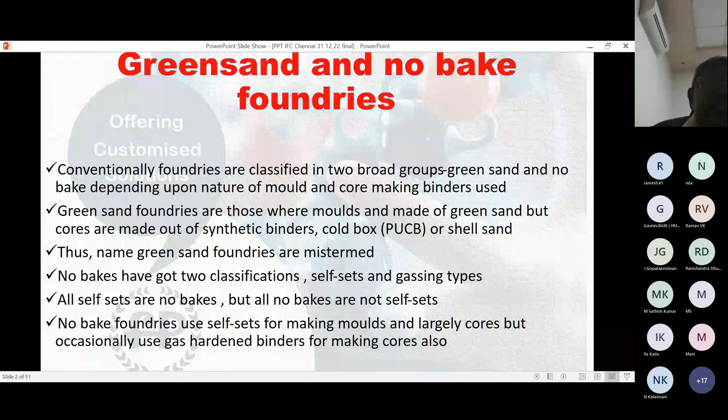So all self-sets are no-bakes, but not all no-bakes are self-sets. Amine cured cold box and carbon dioxide cured phenolic, for example, are no-bakes, but these are subclassified as gassing systems. So this is the total range of self-sets for use in no-bake foundries.

Again, mostly on continuous mixers, these are Furan no-bake, Alphaset, acid cured phenolic, PEP set, alkyd, and silicate self-set. Silicate self-set is in use in very, very few foundries, but it has a future. At present, Furan and Alphaset together enjoy approximately 85% of total market share of binders in use in no-bake foundries.

So this is the present and future of no-bake binders in India. Furan and Alphaset are the most popular, as I have already told you, so our topic of discussion will be on these 2 binder systems.

Phenolic no-bake has been mostly replaced by Furan, but recently many foundries have switched back to 2-part phenolic, replacing Furan again, because of the unusual hike in furfuryl alcohol price and Furan price. These 2 systems are interchangeable, so foundries have the flexibility to switch from one to another depending on prices.

PEP set is in use in a limited number of foundries, to my knowledge, in 2 steel foundries, 2 cast iron foundries for making only cores, and 1 non-ferrous foundry.

Advantages of PEP set over other self-sets: fastest curing. This is the fastest self-set on earth, and curing speed matches almost to gassing systems. The molds made out of the system are extremely rigid with exceptional dimensional accuracy, and castings are also very much free from surface defects and dimensionally very accurate.

The largest weight core mold in India is made with PEP set, with the half mold being 2.5 tons of sand. You cannot expect this type of mold from other binder types. Furan is next, but Alphaset you cannot go for because it does not have enough dry strength to handle some bigger molds.

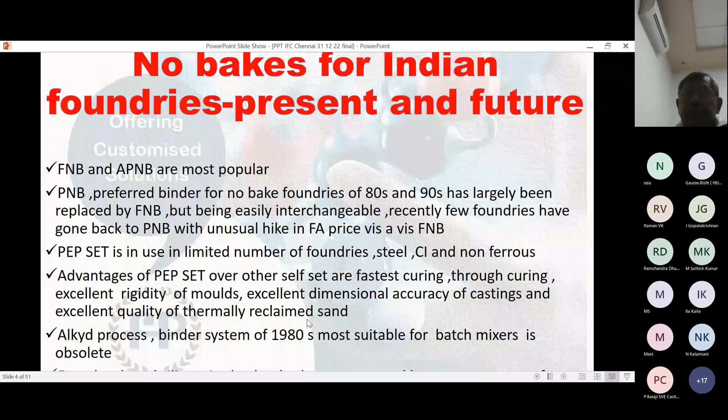So we have talked about the mold making binders for no-bake foundries, particularly in continuous mixers. Cores in these no-bake foundries are preferably made out of gassing systems, and big ones out of self-sets.

Binder systems for mold and cores should be compatible to achieve uniformity in quality of reclaimed sand. For example, Alphaset molds with carbon dioxide cured phenolic cores, and PEP set mold with cold box core - these are compatible and you can reclaim together. So contamination does not matter.

Now the basic requirements for a binder to be competent for use in your no-bake foundry. Strength has been classified into three main sections. Dry strength - this is the strength required by molds at different stages, right from stripping to closing.

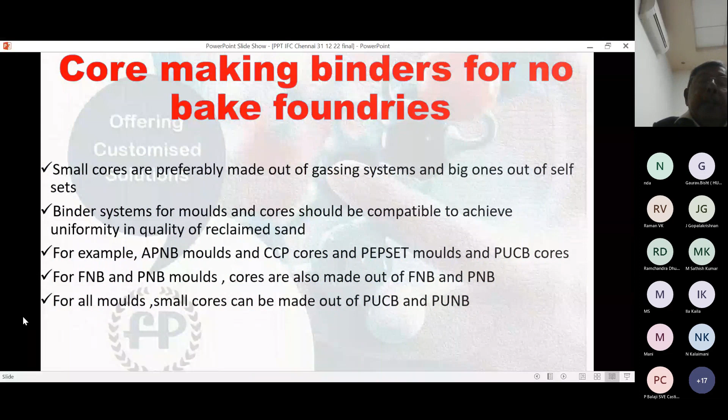Post pouring, the mold should not crack before skin formation is over, in order to resist leakage. The mold should not deform until castings attain rigidity and retain strength. After solidification, the assembly should disintegrate slowly, enabling shifting of the assembly to the knockout zone without much spalling. This disintegration process of molds should be complete after cooling, to enable easy removal of castings, and the system should be cost effective.

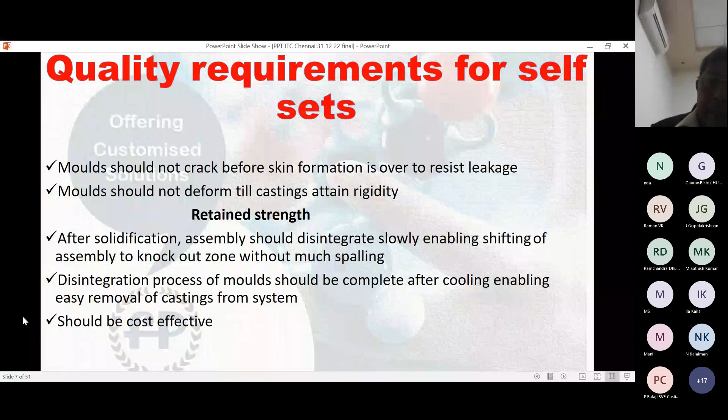So these are the ideal requirements, but no binder is ideal. In practicality, you have to make some compromises — to gain one strength, you may have to lose another. That depends upon the optimization of the use of different binders in particular foundries.

So let us talk about Furan. Furan was introduced in the world market in the 1960s along with acid-cured phenolic. But this system could not find application till the 1980s because these are basically fast systems, and handling them requires continuous mixers. In the 1980s, in the middle of that decade, commissioning of continuous mixers started in India.

Before that, alkyd was the most commonly used self-set binder in batch mixers in Indian foundries. In the mid 1980s, IMF introduced maybe around a dozen continuous mixers through the gentleman Mr. Jack Frost, who is no more. Then Indian foundries started using these two systems, Furan and acid-cured phenolic. But at that time, acid-cured phenolic got preference because Furan formulations were not suitable for Indian conditions.

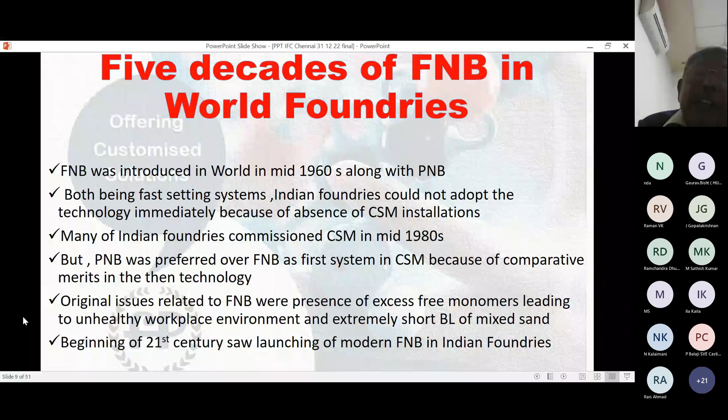The major issues were that these are extremely fast systems, particularly in summer, so the bench life could not be achieved. Also, it had a huge smell of free formaldehyde, a huge irritating smell on the shop floor. So it remained dormant till the end of the 20th century and beginning of the 21st century, with modifications to Indianize the systems. After Indianizing, it became a viable binder suitable for Indian conditions.

So from the beginning of the 21st century, over two decades, it has been modified in many ways. And today it is one of the two most commonly used binder systems in Indian foundries.

Going through the chemistry, it consists of two components: resin and catalyst. Resins are low molecular weight polymers of furfuryl alcohol. Furfuryl alcohol is an agriculture product — it is the only reactant for formaldehyde apart from phenol. This is an agriculture-based product.

So furfuryl alcohol and formaldehyde are reacted in the presence of either urea or phenol or both. For formaldehyde, there are three reactants. The catalyst is a single or blend of aryl sulfonic acids like paratoluene sulfonic acid, xylene sulfonic acid, etc., with occasional blending with sulfuric acid, which acts as a kicker particularly at low temperature. Apart from the polymerized form, furfuryl alcohol also remains in free form in binders, which contributes to the strength of composites.

Furfuryl alcohol, when added with acid, reacts violently to polymerize and the mass becomes very rigid. That means free furfuryl alcohol also acts as a binder for sand particles. It is beyond the scope of this presentation to explain why all acids cannot be used, such as nitric acid, sulfuric acid, or hydrochloric acid, because these don't give the required bench life with the mixed sand — they give uncontrolled reactions. The curing mechanism is that Furan resins are not stable below a particular pH, so by lowering the pH of the resin, its curing takes place.

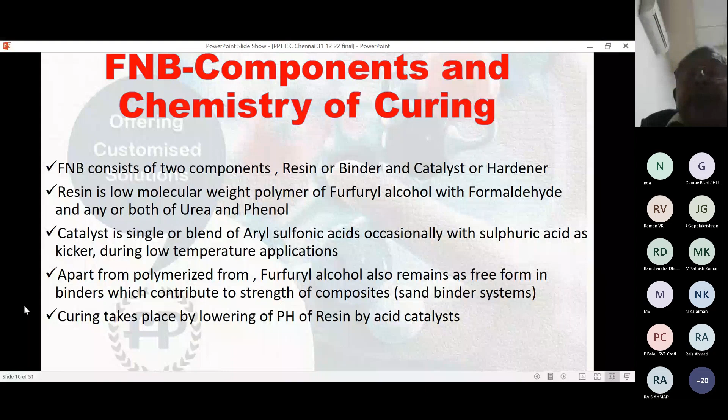So what is modern FNB, and what are the deficiencies? Formulations of Furan have been modified in many ways after understanding the chemistry of polymerization. Original Furan formulations were based on low molecular weight polymers of furfuryl alcohol and urea with formaldehyde — that is, urea, formaldehyde, and furfuryl alcohol — with free furfuryl alcohol as reactive diluent used to be part of the formulations.

So this is the polymer of furfuryl alcohol, urea, and formaldehyde, with free furfuryl alcohol as reactive diluent. Most present formulations contain phenol as a third reactant, along with furfuryl alcohol and urea, formaldehyde being the common reactant. So there are 3 reactants at your disposal for reaction with formaldehyde, giving huge flexibility in formulating the resin from the standpoint of a manufacturing chemist.

Furfuryl alcohol alone with formaldehyde does not produce workable polymers, at least for use as no-bake binders in foundries. That means, although it's possible to react furfuryl alcohol with formaldehyde in different pH conditions, it does not form a workable polymer as a no-bake binder. You need to add either urea or phenol or both.

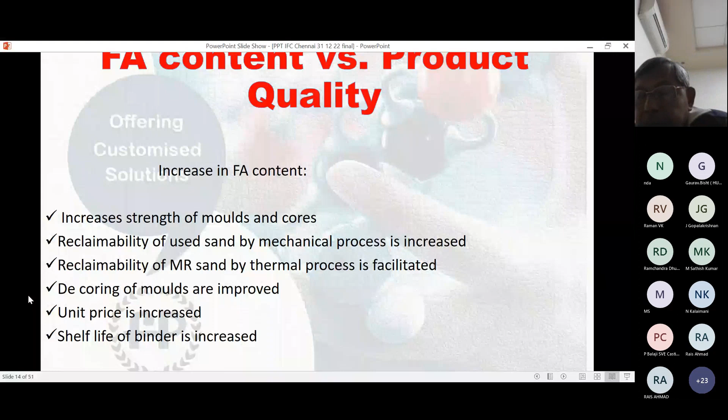Then comes the moisture content. Increase in moisture content increases bench life of mixed sand, but decreases storage life of binder, because the phenolic component of the resin slowly advances, and when it advances to a particular stage, viscosity increases. So it decreases storage life of the binder, and reduces through-curing of molds because water remains and does not evaporate from the system, nor is it consumed in the system.

In case of flaskless molds, it causes occasional puncture of molds because of formation of extra steam at the pouring temperature of metal, and it induces hydrogen porosity in steel and aluminum castings.

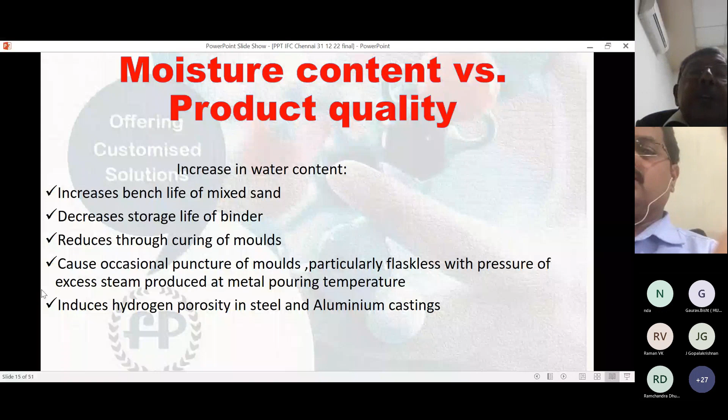Nitrogen content versus resin quality. Nitrogen content in binder is the most important criterion related to binder quality - the more nitrogen, the lower the quality rating. Nitrogen comes into the resin from urea, one of the reactants already discussed. Urea in polymer chains dissociates into elemental nitrogen at the pouring temperature of iron, which has solubility in liquid iron. Entrapped nitrogen causes pinhole defects in castings.

Solubility is directly proportional to liquid metal temperature. Pouring temperature being higher, logically, steel is more prone to nitrogen pinhole defects than cast iron. In contrast to the popular belief that furan cannot be used in steel foundries because of the presence of nitrogen in the system, modern furan has proven to be suitable for all types, sizes, and thicknesses of steel castings without nitrogen-related defects.

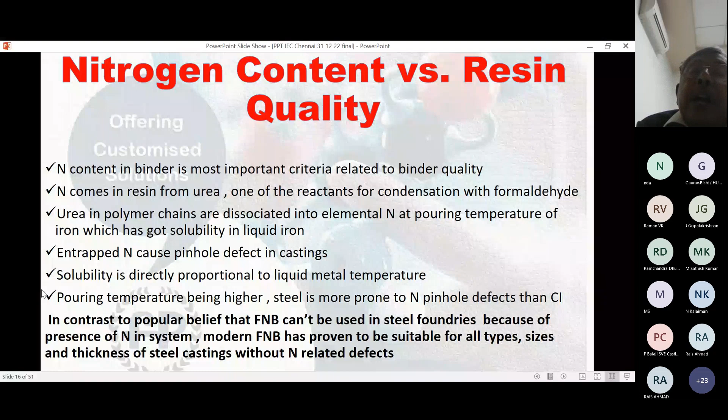Source of nitrogen is more important than total nitrogen. We have already discussed that nitrogen in elemental form is soluble to the metal, not in molecular form. So all nitrogen bearing components are not equally prone to dissociation to eliminate nitrogen. Nitrogen from urea gets easily dissociated to eliminate nitrogen.

As for example, hardeners for cold box and PEP set contain MDI, where nitrogen content varies from 7.84%, and it is added 0.8 to 1% by weight of sand. But castings produced in molds and cores made using these systems are not as prone to nitrogen pinhole defects, as here nitrogen is bound in complex form, resisting dissociation to elemental nitrogen.

So this is the limit of nitrogen - it is a thumb rule and book value. Furan as binder for cast iron casting should have nitrogen less than 3%. Furan as binder for steel casting should have nitrogen less than 1%.

It is more appropriate to talk about percentage of nitrogen in molding sand than in binder. Nitrogen in molding sand for cast iron should be less than or equal to 0.15%. That is the value I have copied from BCIRA, and many foundries using cold box test nitrogen to see that this limit is not exceeded. For lightweight steel castings, nitrogen should be less than 0.10%, and for heavy steel castings it should be less than 0.05%.

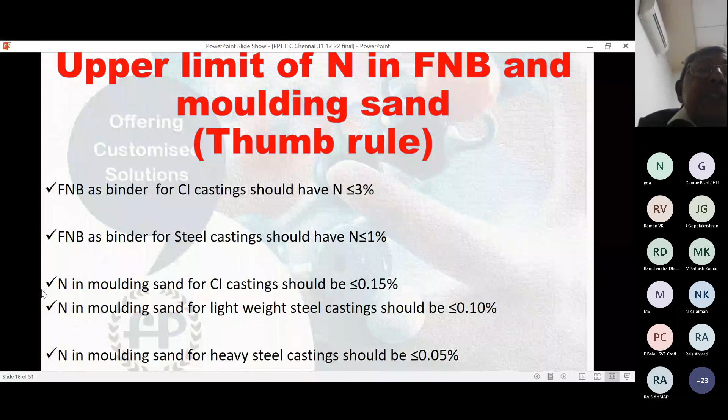Now comes sulfur in molding sand. Sulfur comes in molding sand from sulfur-bearing acids used as curatives. The most common acids are paratoluene sulfonic acid and xylene sulfonic acid, both aromatic sulfonic acids. In India, xylene sulfonic acid is rarely used because it is required only at temperatures below 10 degrees centigrade, a very low temperature application, and it is always costlier than PTSA. As I have already told, sulfuric acid is also sometimes added at low temperature to increase the rate of setting.

Mathematically, sulfur content in PTSA monohydrate is 16.85% and in sulfuric acid is 32.69%. Why am I talking about PTSA monohydrate? Because solid PTSA crystallizes out of water as monohydrate, just as copper sulfate comes with 5 molecules of water. This is the topic foundrymen know better than me, but as customary, I have taken this out of literature or some published papers.

SG iron demands less than 0.03% sulfur in molding sand to avoid denodularization of the surface of castings. In some publications, the value given is less than or equal to 0.7%. Apart from that, precipitation of magnesium sulfide takes place when molding sand contains excess sulfur, which counts as inclusion in castings. Special thinner-based coatings containing graphite and magnesium oxide are used in many cases to compensate for loss of magnesium used for nodulization. In steel casting, sulfur is generally regarded as an impurity and needs to be reduced to practicality, except in some special cases, one being ease of machinability.

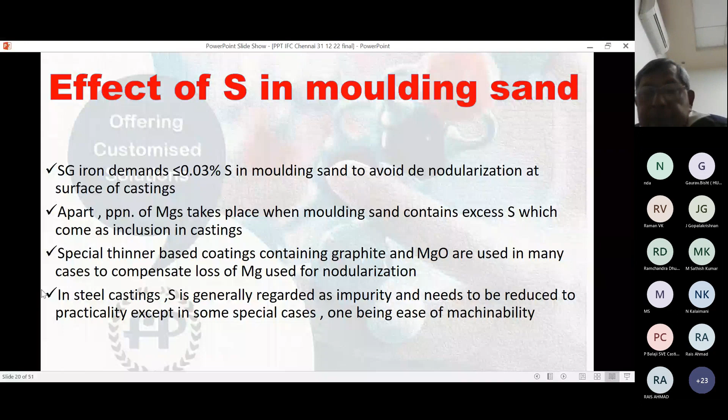So other acids are catalysts. Phosphoric acid is the only non-sulfur-bearing acid used as curative for furan. It is mostly used in combination with sulfur-bearing acids as it does not perform well alone. Carriers or diluents for all catalysts are water or methanol.

Potency of catalyst varies depending upon dilution ratio. For example, if you take paratoluene sulfonic acid, you can dilute it up to 70%, 60%, 50% - the more it is diluted, the less reactive it is, which increases bench life. But there is an upper limit of dilution. You cannot make it 90% because at that point it reaches the saturation temperature of the acid and precipitates. So in most cases, the upper limit is not more than 75%.

Apart from dilution, you can also control by percentage addition from 30 to 60%. So there are two variables for you: one is the dilution ratio of active component and carrier, classified as strong, medium or slow acid, and the other is percentage addition, which is 30 to 60%.

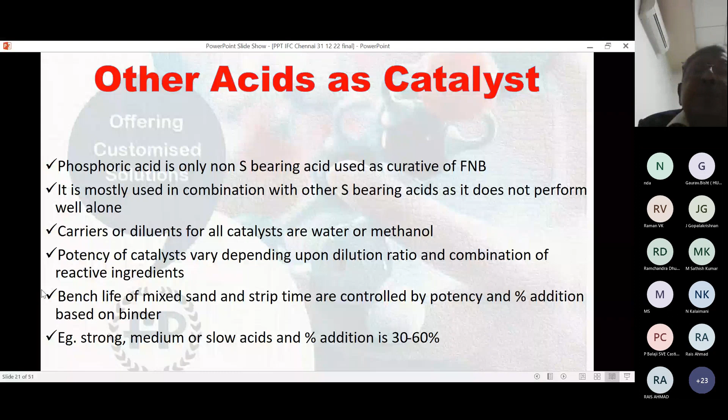So this is the latest development in Furan technology: extremely low binder demand, 0.75% in case of mechanical sand; improvement in dry as well as hot strength; improvement in tensile strength as never before; binders with extremely low nitrogen as low as 0.4% and even nil; variants with high collapsibility for use in non-ferrous castings; customized formulations with better understanding of chemistry; and modern formulations containing extremely low free formaldehyde, offering an extremely congenial workplace environment.

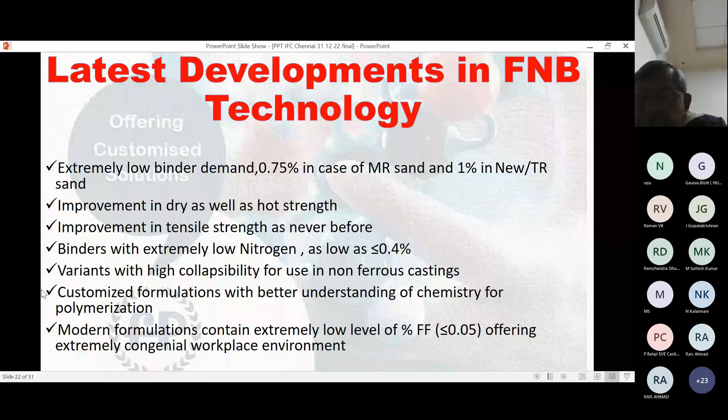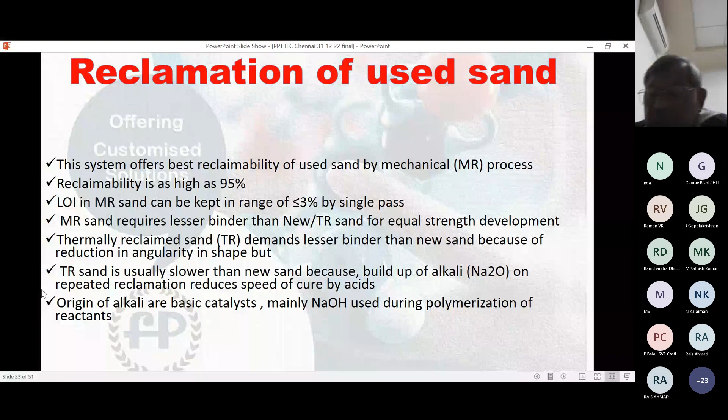Reclamation: this system offers the best reclaimability of used sand by mechanical process, as high as 95%. Low LOI in mechanical sand can be kept well below 3% by single attrition. Mechanical sand requires lesser binder than new sand for equal strength development. Thermal or TR sand demands lower binder demand than new sand, but thermal sand is usually slower than new sand due to build-up of alkali on repeated reclamation. The origin of alkali in the reclaimed sand is sodium hydroxide, used in the manufacturing of phenol formaldehyde resin.

So now I have given most of the foundrymen the sand controls. Then carry out this test as a routine test. LOI is a very simple test; I'm not going to elaborate much.

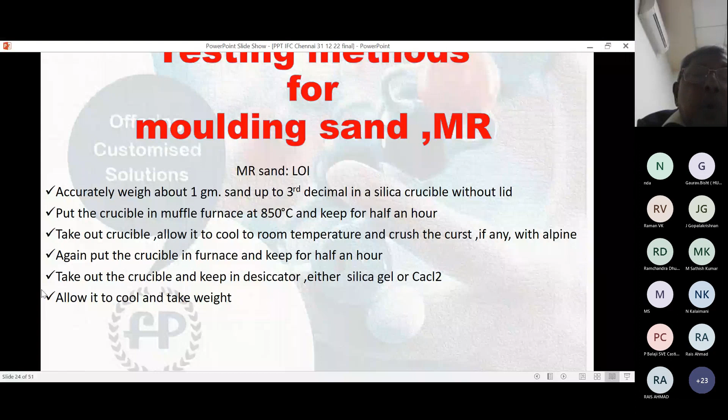The theory is that you take a small quantity, around 1 gram of mechanically reclaimed sand, in a silica crucible, and allow the volatiles to go at 850 degrees centigrade to remove all the volatiles. Organic matter will burn away and inorganic or sand will remain along with a small amount of sodium oxide. So LOI is expressed as the percentage of mass lost during the experiment, based on charge weight.

This alkali demand value is just the opposite of acid demand value for virgin or raw sand. Around 5 grams of sand is taken into a 250 milliliter flask, thoroughly boiled, filtered, and the filtrate is completely transferred to another flask. It is titrated against standard sodium hydroxide caustic solution using phenolphthalein as indicator, and the figure is expressed as milliliter 0.1 normal NaOH per 100 gram sand.

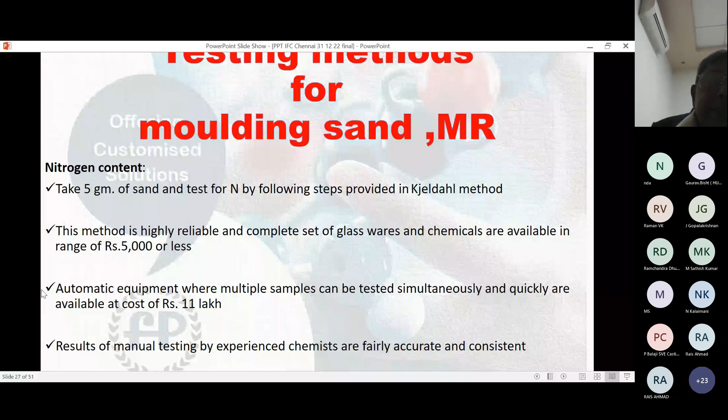Now comes nitrogen content. This is the most important test, and it is a little difficult unless the chemist has practiced it, but in routine testing it can be done easily. The theory involves a special apparatus called the Kjeldahl apparatus, named after a Danish scientist who invented the process. The glassware costs not more than 5,000 rupees including chemicals. An automatic instrument is available, but the semi-automatic instrument itself costs around 11 lakhs, and manual testing by an experienced chemist is good enough. So this is the theory.

First, on the left-hand side, there is a Kjeldahl flask. Here the small sample to be tested is taken into the flask and different reagents are added along with sulfuric acid. It is digested where the nitrogen-containing compounds are converted to ammonium sulfate with sulfuric acid. This is the first stage of the reaction.

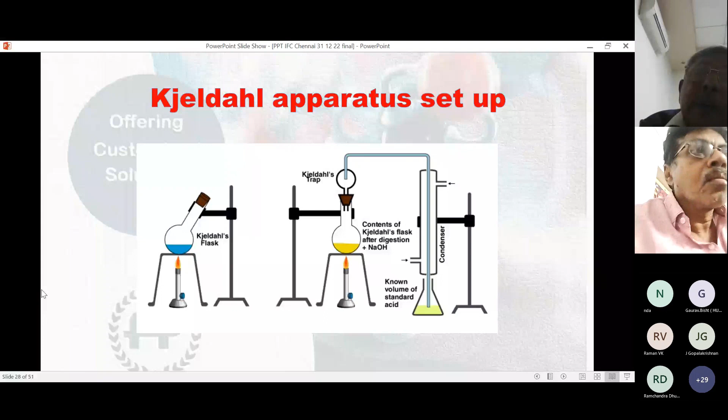The second stage of reaction is on the right-hand side. This is the Kjeldahl attachment, the round bottom flask you are watching. It is transferred from the left mass to the round bottom flask mass on the right-hand side, and the following attachment is the Kjeldahl attachment. In this flask, strong sodium hydroxide is used to convert all the ammonium sulfate to ammonia, and that ammonia is absorbed in either dilute acid or water in the conical flask at the bottom.

When all the ammonia is dissolved, if you are using a small quantity of standard acid, the ammonia liberated will consume the acid to some extent, and the excess acid is titrated with standard alkali using methyl orange as indicator. So 17 grams of ammonia will form 14 grams of nitrogen. Based on the input weight, you can calculate it as a percentage.

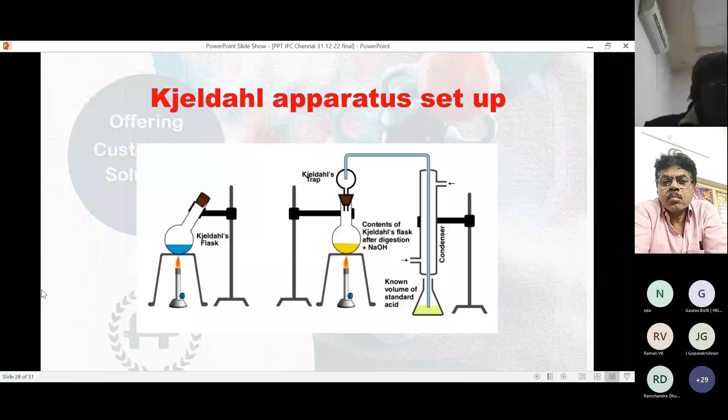Then sulfur content. Sulfur content is also a very intricate test, and many research laboratories have an analyzer called CHNS. These elemental analyzers are available at different IITs, but my experience of getting samples analyzed at this low value of sulfur is not very good. I had given samples to 2 laboratories, and results were far from reality even in my standard sample. So in our laboratory we have tried to develop a test, and we have seen that results are fairly accurate. I will tell you the theory, and we have the calculations which you can go through afterwards leisurely.

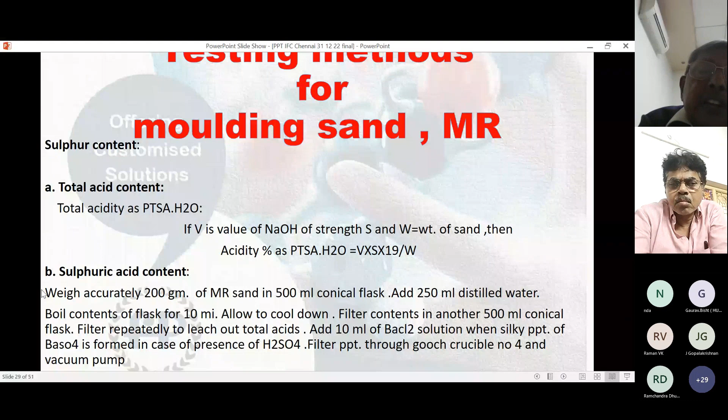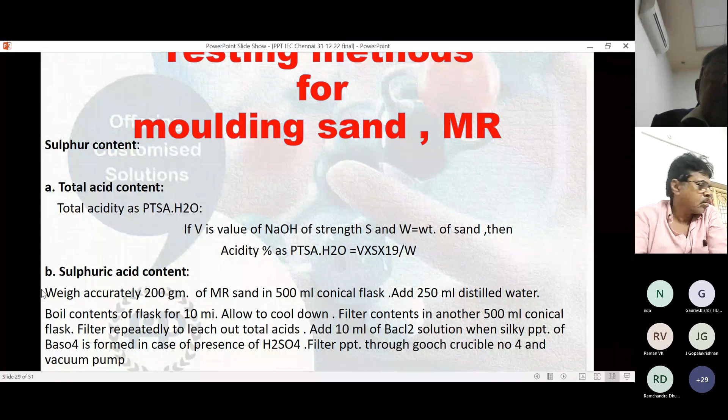First, for sulfur, the sample, like the testing of alkali demand value, is boiled in water and transferred to a conical flask by filtration, where all the acids, including sulfuric acid and PTSA, being water soluble, come into the flask. Then you titrate with standard alkali, 0.1 normal caustic soda, to get the total acidity, and you calculate the total acidity assuming it is paratoluene sulfonic acid. So from the titer of the sodium hydroxide you can find how much paratoluene sulfonic acid is there. Now you have assumed it is only PTSA, but it may or may not contain sulfuric acid also.

So the next step is that to the same filtrate, you add barium chloride solution. Barium chloride forms a sulfate precipitate with sulfuric acid only, not with paratoluene sulfonic acid. The barium sulfate formed is a very silky precipitate. You filter it with a Gooch crucible number 4 with the help of a vacuum pump. The Gooch crucible retains all the sulfate as barium sulfate, and by weighing it gravimetrically, you know how much barium sulfate has formed, which is equivalent to how much sulfuric acid, and that sulfuric acid is equivalent to how much paratoluene sulfonic acid. So deduct the total sulfuric acid from the paratoluene sulfonic acid figure, and now you get 2 components.

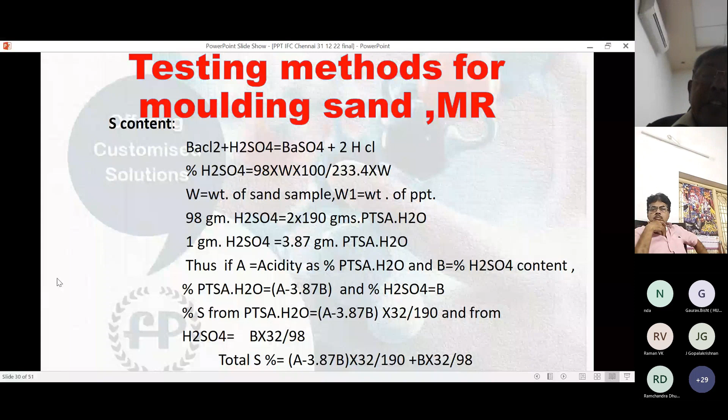With sulfur bearing components: one is PTSA, another is sulfuric acid. With the figures I have already given you, you can calculate how much percentage sulfur comes from sulfuric acid as well as from PTSA. These calculations, if you want, I'll forward to you. These are very accurate tests.

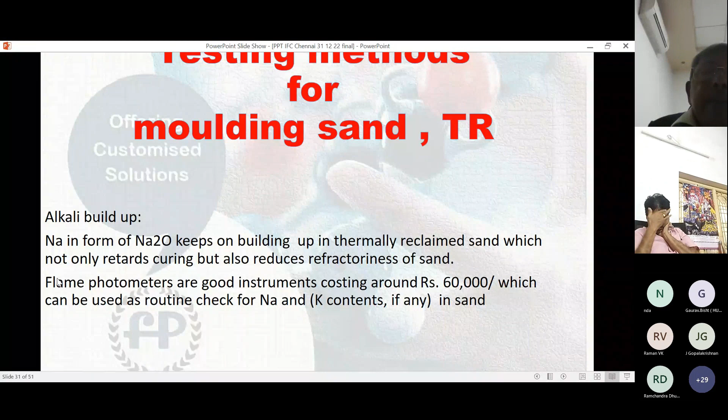So this is for your Furan.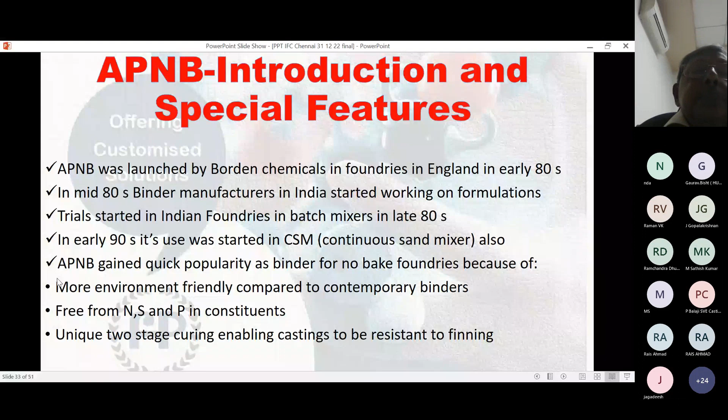In brief, this is the details of Alphaset. There are two component systems. The resin is phenol formaldehyde resin, and small chains are restricted, surrounded by potassium and sodium ions. These small chains are separated by this, meaning the media is strongly alkaline, and this phenol formaldehyde resole type resin is one-stage resin. That's why it advances in storage, so stability is lesser than Furan. Hardeners are esters of polyhydric alcohols or polybasic acids. The total organic composition of the binder here is only 40%, the rest being water and alkali.

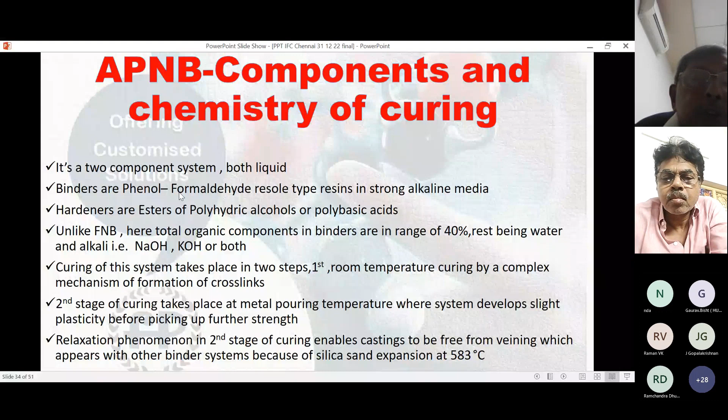Curing of this system takes place in two steps. First, room temperature curing by a complex mechanism of formation of crosslinks - this is precisely the hot stage, your dry stage. The second stage of curing takes place at metal pouring temperature, where the system develops slight plasticity before picking up further strength. Relaxation phenomena in this second stage of curing enable castings to be free from veining, which appears with other binder systems because of silica sand expansion at 583 degrees centigrade.

This is a mechanism I have tried to establish for the first stage of curing. See, curing is always meant by formation of lateral primary bonds and conversion of thermosetting material. So the first line you can see is a linear chain, and second, some lateral chains have formed.

So this gives the molds and cores made out of your Alphaset bonded sand, for which it is sufficient right from stripping to closing. So basically it is a dry stage.

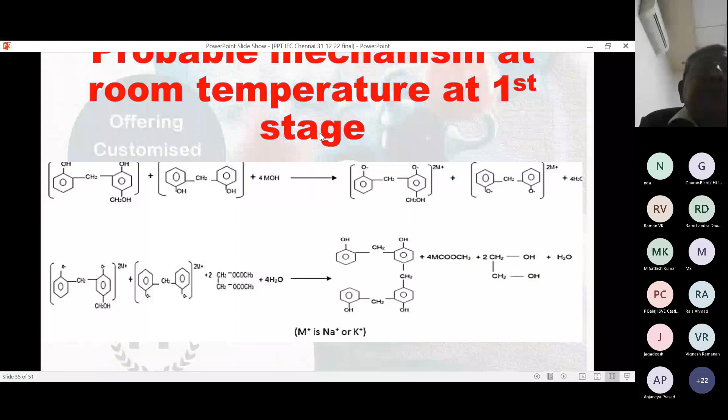So what is the development in recent time? With better understanding of the chemistry of polymerization and curing in the last 3.5 decades, it has been possible to modify resin formulations in many ways. This led to the launching of a series of hardeners in the beginning of the 21st century to achieve diversified bench life and strip time. That was one addition in the beginning of the 21st century. Then it has been worked on to give longer storage life. Then optimization of variables like total alkali, ratio of total alkali of sodium and potassium, and moisture content - all to give customized formulation required for individual foundries.

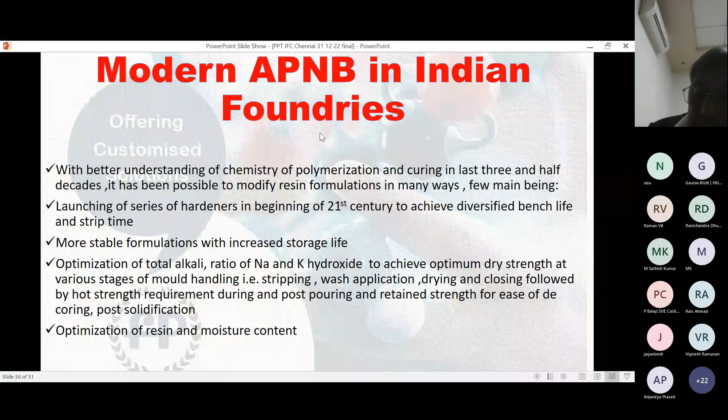Unlike Furan, where the percentage of furfuryl alcohol in the finished product has a direct relationship with quality, in Alphaset there is no such constituent with similar importance. So the usual composition of the binder is resin 35 to 45%, water 45 to 50%, and alkali 10 to 15%.

So this is the most widely discussed topic - it is the sodium-potassium controversy. I have written controversy because many foundrymen believe that potassium... of course, these ideas are spread by suppliers only to undermine other chemicals, because it is believed that as potassium hydroxide is costly, people compromise with quality by adding more sodium hydroxide. But we have already experienced that that is not the case.

However, I have given you two references, both from European journals. In both publications, they have not told anything regarding the quality of castings and relations with the type of alkali used. These publications only talk about the reclaimability of used sand while using the two types of alkali. Sodium hydroxide gives better reclaimability in mechanical process, and potassium in thermal process. They have not written anything regarding the quality.

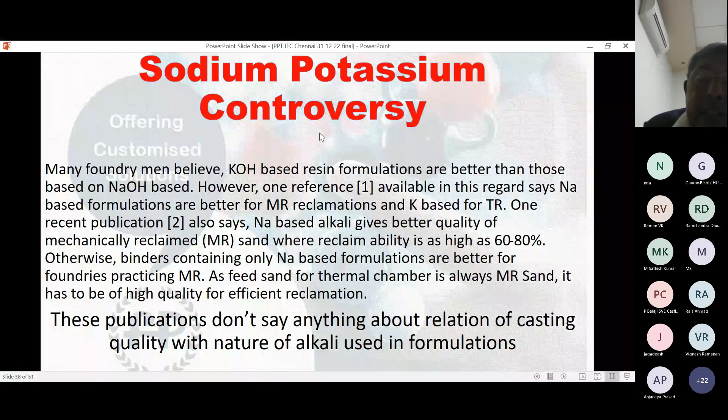But this is one more paper where a group of researchers, while converting a steel foundry from sodium silicate to conventional means, first used an Alphaset potassium based system. With the conventional potassium based system, when they converted, they found improvement in surface finish and hot tear of the castings. While converting from sodium silicate to potassium based system, surface finish and hot tear of castings improved, but shrinkage of large castings was experienced - that is, using potassium based Alphaset.

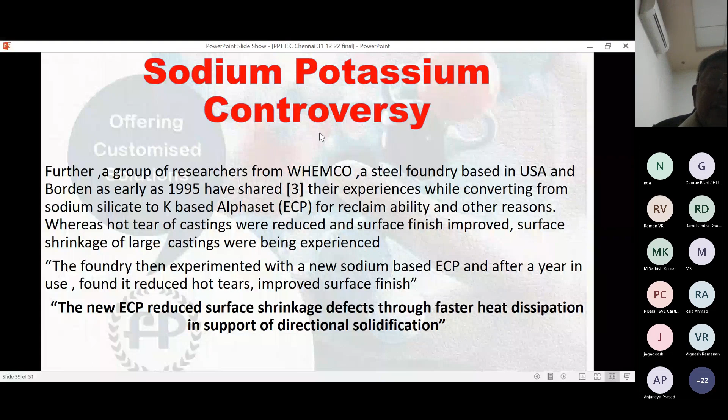The foundry then experimented with a new sodium based ester cured phenolic, and after a year in use, found it reduced hot tears and improved surface finish. The new ester cured phenolic reduced surface shrinkage defects through faster heat dissipation in support of directional solidification. This is not my word - this is recorded, and this is the reference I have given. You can cross-check from the literature.

So now for the final phase, your comparison.

APNB works with binder level of 1.2 to 1.6%, which is much more demanded than your Furan. Furan works at as low as 0.8% in reclaimed sand. Quality of reclaimed sand is also far better in case of Furan compared to Alphaset. With all this, even a new sand at 2% addition, rarely does Alphaset sand exceed dry strength of 25 kg per centimeter square, whereas mechanical reclaimed sand using 0.8% goes more than 45 per centimeter square dry strength.

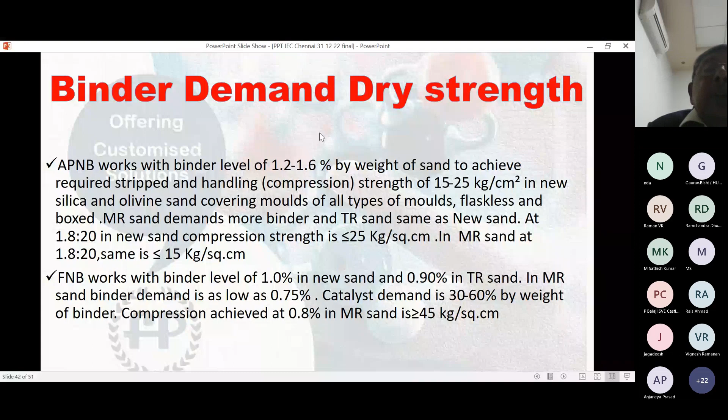So this is already discussed, and mechanical reclaimed sand for Alphaset is very weak in bond formation. Even while using in backing sand, you need to increase the binder content so that it does not spoil.

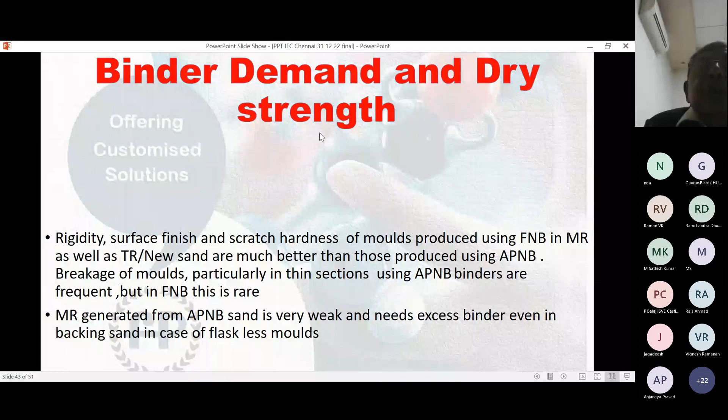This mechanical attrition offers reclaimability of as high as 95% in Furan, and maximum 70% in case of Alphaset. Mechanical reclamation followed by thermal reclamation brings reclaimability of Furan sand to practically 100%. It is not required in case of Furan sand. Still, many foundries reclaim a small portion of their mechanical sand by thermal method so that their input of new sand is reduced.

Thermal reclamation for Alphaset sand requires a special chemical in form of aqueous slurry for pumping in thermal chamber along with mechanical sand for removal of inorganic salts along with fines. This involves capital investment and recurring cost also.

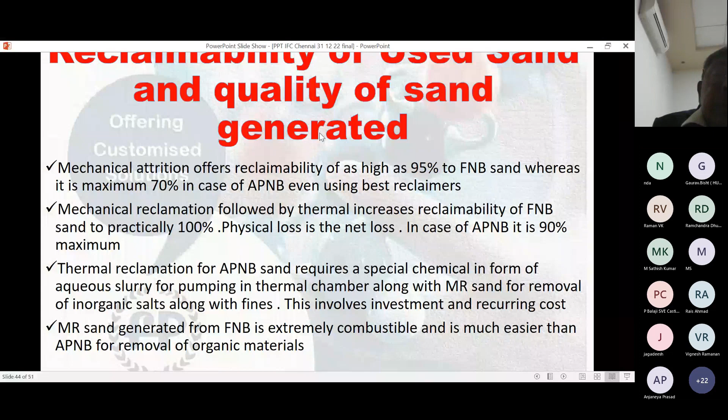Mechanical sand generated from Furan is extremely combustible and much easier than Alphaset sand for removal of organic materials. In this direction, Furan users must work hard, and there is some reference work going on at AGH University, Krakow, Poland, where they have a prototype reclaimer. I have seen publications and visited that institute personally. I know the professors; they are working on the disposal of fines generated from mechanically reclaimed Furan sand.

Stability of thermal reclaimed sand - this is an observation. Thermally regenerated APNB sand or Alphaset sand has been found to lose reactivity and drop in strength with binder on storage, reaching a stage of no reactivity. Of course, I should add that I have not studied all sand from all foundries, but a couple of foundries have been studied and we found that reactivity decreases to a point of no reactivity along with the binder. In case of Furan, buildup of sodium leads to slowdown in reactivity, demanding more catalyst, but no drop in strength is experienced unlike Alphaset.

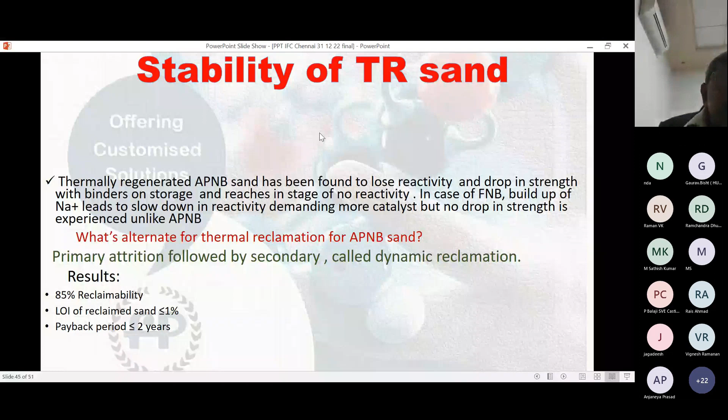What's the alternate for thermal reclamation of APNB sand? Because 65% is no good, maximum 75%. So I've got a couple of examples: primary attrition followed by secondary, called dynamic reclamation. Here, reclaimability of 85% is assured, LOI of reclaimed sand less than 1%, and payback period reported in a particular foundry is less than 2 years.

Environment: binder components of Alphaset contain phenol formaldehyde resins. Although not a must for Furan, most formulations have it. It is well documented that phenol formaldehyde resins are safe for internal and external use in ambient conditions. You must know the Scotch-Brite used for cleaning utensils contains phenolic resin. So as a resin, phenol is not harmful.

However, many of the organic compounds released on pyrolysis of phenolic resins at metal pouring temperature are toxic to different extents. Content of free phenol, a potential toxic chemical, is less than 0.5% in Alphaset and less than 5% in Furan. Both are lower than the upper limit of the most widely used core making binder, phenolic urethane cold box. But I won't say this is not harmful - it has to be reduced further.

Then formaldehyde is toxic and an eye irritant in free form. In APNB or Alphaset, it is too low to be traced by analytical instruments. In modern Furan, its value is reduced to as low as 0.05%.

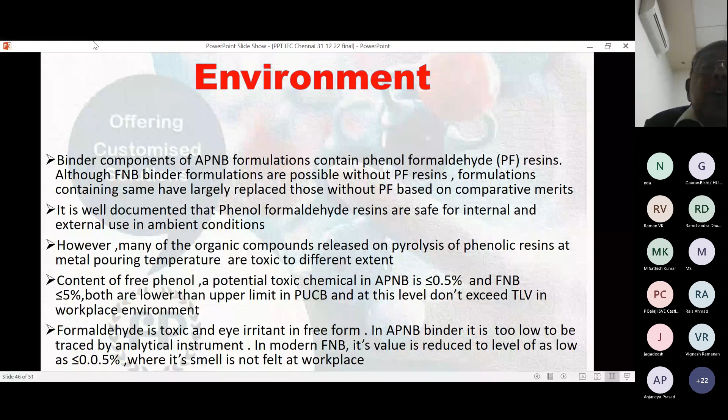So this is a relatively unknown phenomenon. One of the main reasons for quick acceptance of Alphaset was its least adverse impact on environment compared to contemporary systems. However, it was later realized that this system releases formaldehyde, a potential eye irritant, during curing with the hardeners. This is felt in the shop floor during mold movement and also during baking after wash application. In Furan, this phenomenon is not evident.

So this is the mechanism. I don't think whether you can see it.

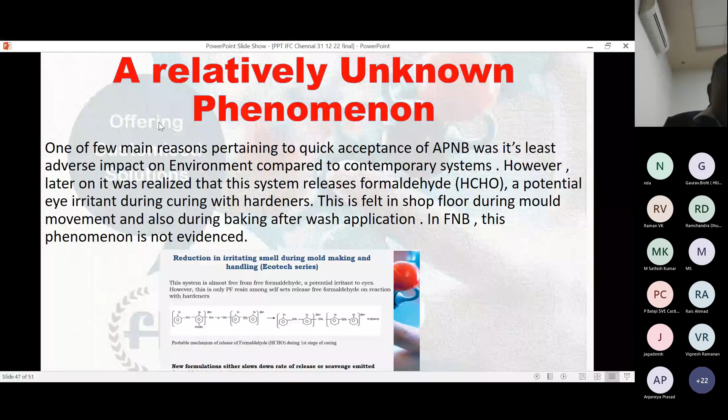This is the mechanism by which formalin evolution during curing is possible with Alphaset. I have a couple of slides more.

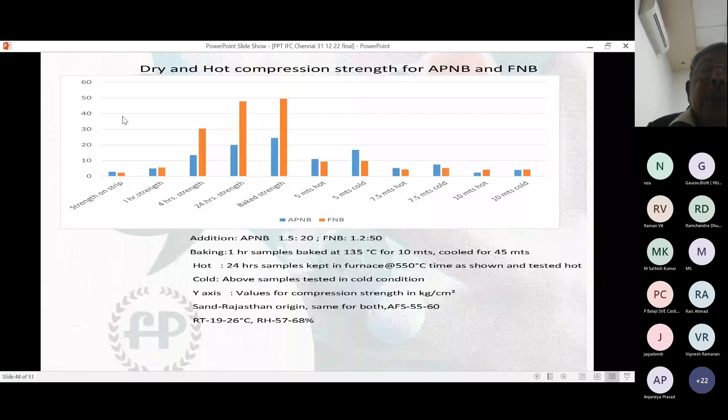As I told you, strength requirements of binder systems can be categorized into 3 sections: dry, hot, and retained strength. On the left, you see the dry strength of Alphaset and Furan at practical addition levels, where Furan has enormous strength. But after metal pouring, the strength of Furan mold drops drastically, even below the level of Alphaset. Usually, inorganic binders, mainly sodium silicate, have very good hot strength, but dry strength is lower, so binder addition has to be increased to raise dry strength, which eventually increases hot strength too. That is the disadvantage. Alphaset, being a combination of inorganic and organic, gives a compromised formula for dry and hot strength. This is its strength and weakness.

I think this is the last slide. You have to have patience for another 2 minutes.

Silica sand choice for Alphaset is wide; in Furan it is limited. Flexibility of formulation in Alphaset is limited with a lot of variables; in Furan it is wide. Storage life for Alphaset is 2 months in summer, whereas in Furan it is more than 6 months. Performance during storage life in Alphaset deteriorates, particularly in summer. If you use it after 7 days versus after 17 days of manufacture, you will find a difference in formula reactivity. The range of bench life of mixed sand in Alphaset is wide; in Furan it is narrower than Alphaset.

Dry strength is good for Alphaset but excellent for Furan. Hot strength is excellent for Alphaset and good for Furan. Decoring is difficult for Alphaset, good for Furan. Reclaimability by mechanical means is 70 to 85% in Alphaset, 85% in Furan. Reclaimability is 90% for Alphaset and 98% for Furan. Quality of mechanically cleaned sand is poor in case of Alphaset, excellent in case of Furan.

Recipe or use level is 1.2 to 1.6 is to 20 in case of Alphaset; it is 0.8 to 1.1% is to 40 to 50 in Furan. Casting finish is excellent for Alphaset, fairly good for Furan. In recent Furans we have seen—I cannot quote the foundry names—people have made Furan castings up to 15 tons of steel casting, and another foundry regularly makes 2 to 5 tons of steel casting using the latest version of Furan. I have seen the casting; these have excellent gloss. If you compare cost at a practical addition level, they are more or less the same. So overall economy is good in case of Alphaset, better for Furan.

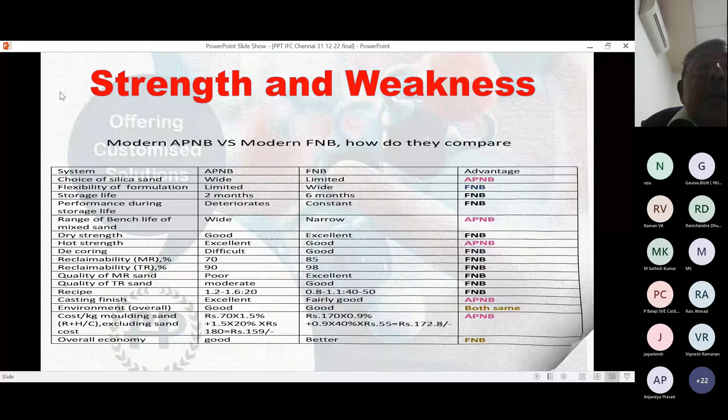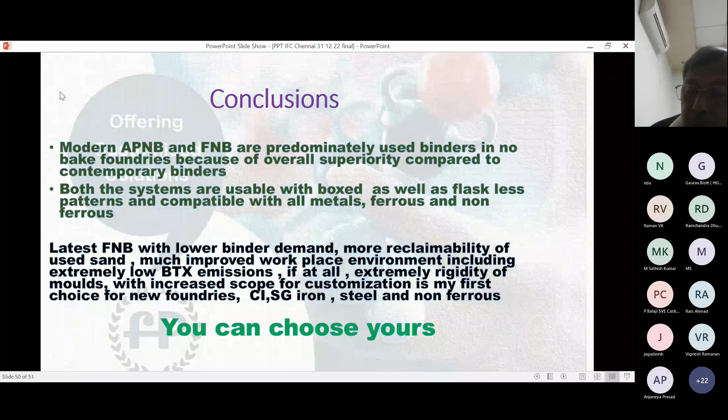So these are my conclusions. Modern Alphaset and Furan are predominantly used binders in no-bake foundries because of overall superiority compared to contemporary binders. Both systems are usable with boxed as well as flaskless molds and patterns, and compatible with all metals, ferrous and non-ferrous. Latest Furan, with lower binder demand, more reclaimability of used sand, much improved workplace environment including extremely low BTX emissions if at all, and extreme rigidity of molds with increased scope of customization, is my first choice for new foundries—cast iron, SG, steel, and non-ferrous. You can choose yours. Thank you, and wishing a happy and prosperous year ahead to you, your families, friends, and dear ones. Thank you once again.